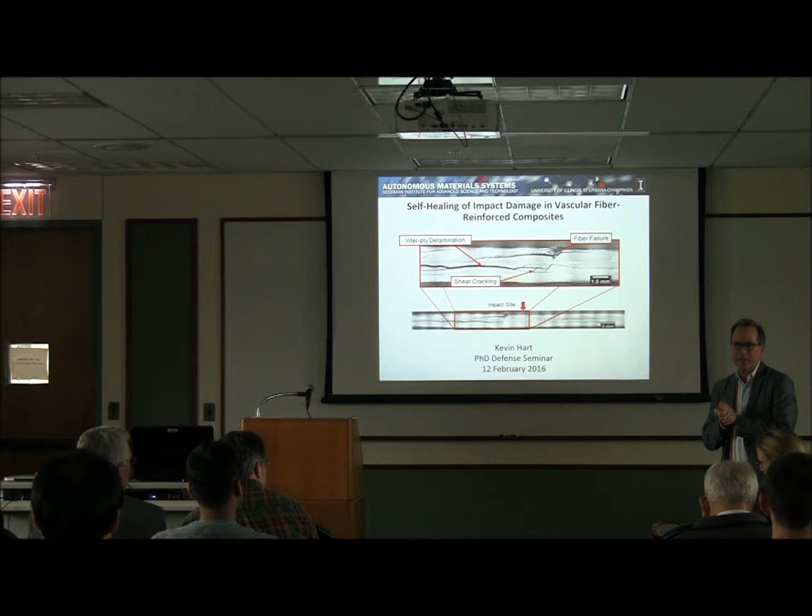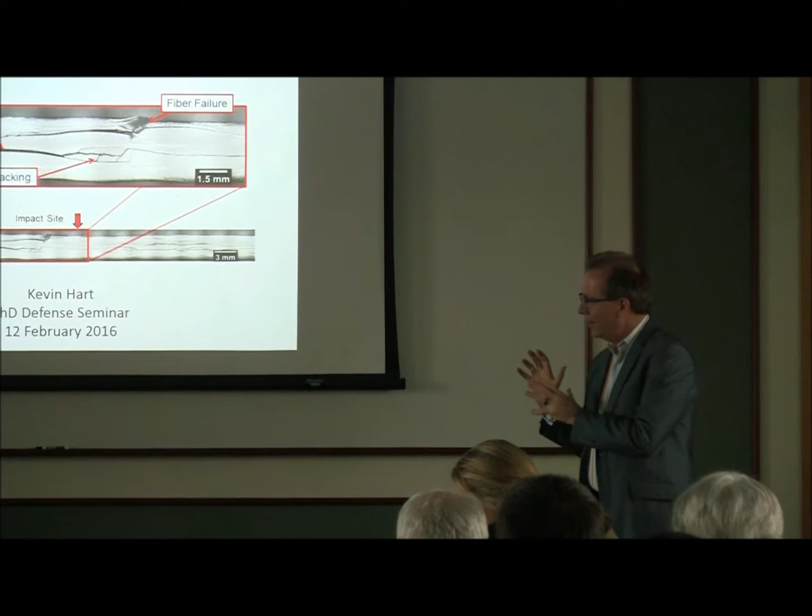He's been with us for a few years now. Came to us from Madison, University of Wisconsin, where he made a name for himself, not only in the undergraduate research lab of colleague Wendy Crone, why he got hired, but also on the football field with the band. He's a die-hard Badger, but we've turned him into a fighting Illini.

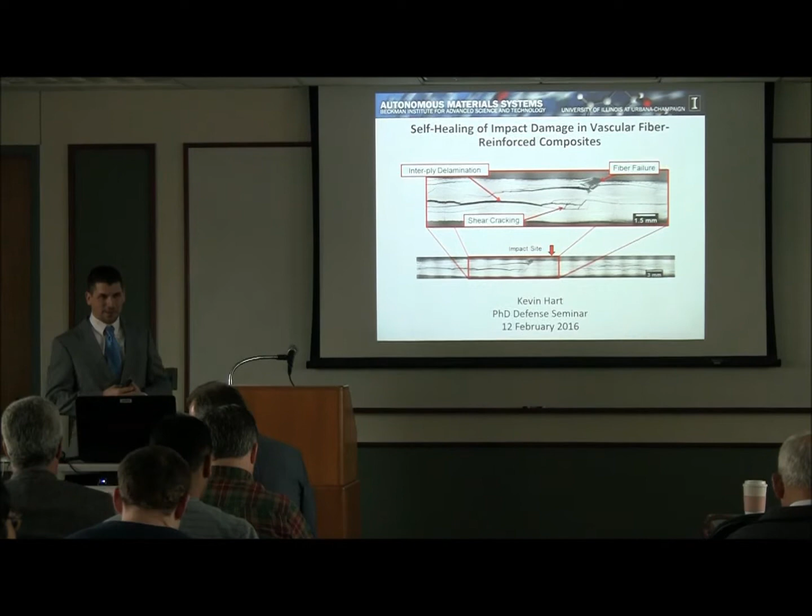Thank you everyone for coming. It's nice to have a really big audience for my presentation today. I'm going to be presenting my dissertation work with the same title as my presentation, which is Self-Healing of Impact Damage in Vascular Fiber-Reinforced Composites.

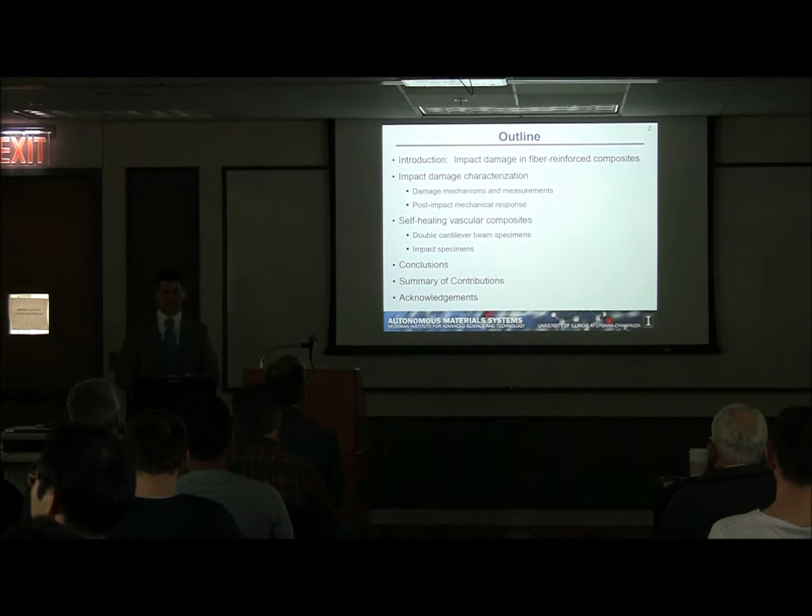So an outline of the talk today: I'm going to go through an introduction quickly on impact damage in fiber-reinforced composites. I'll talk about my contributions, looking at impact damage characterization, and also things I did to accomplish self-healing in a few different types of specimens, including double cantilever beam specimens and impact specimens. Then I'll conclude, provide a summary of my contributions, and finish with the acknowledgments.

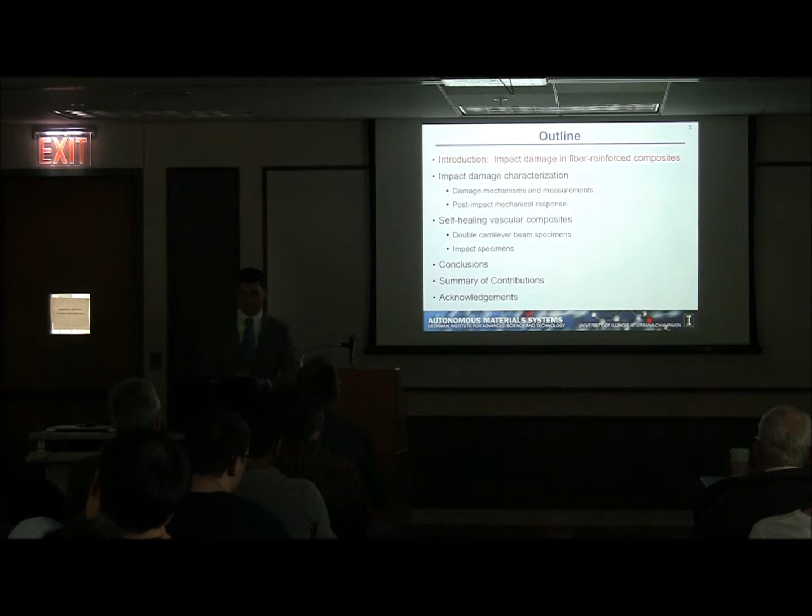First the introduction. I think many people in this room are familiar with fiber-reinforced composite materials, but fiber-reinforced composites are structural materials with two or more chemically distinct phases. These two different phases are usually visually observable in a cross-section. For my particular work, the reinforcement phase I'm going to focus on is glass fiber, and the continuous matrix phase is an epoxy polymer.

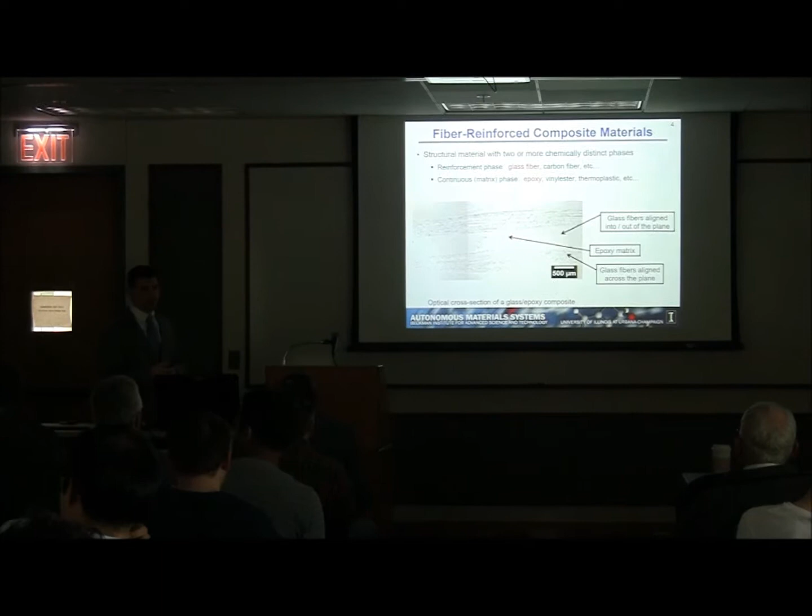So we're going to look at a lot of these cross-sections like this today. I just want to highlight a couple of key things, including tows of glass fibers going across the plane here, some of them coming out of the plane at us, as well as epoxy regions here. So you see the chemically distinguishable components.

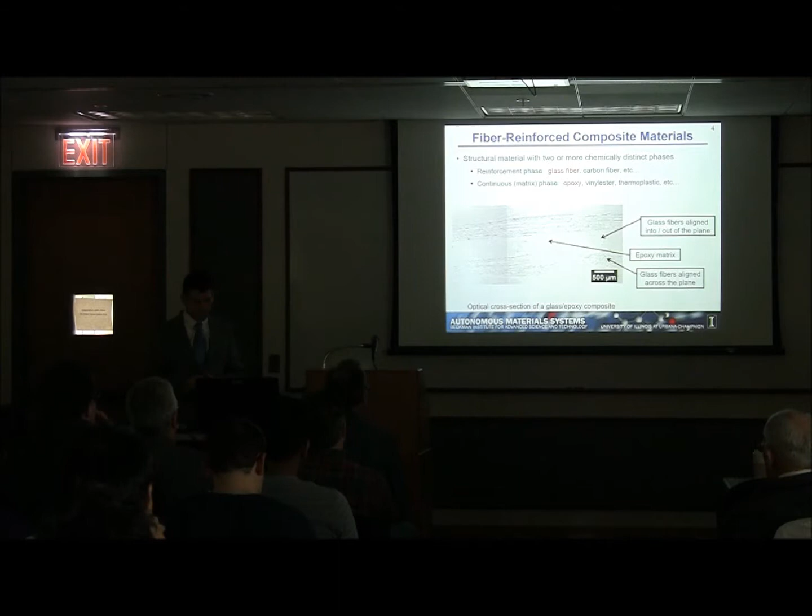Composites are beginning to emerge in our world at a very fast rate. They're useful in applications demanding very light, very strong materials because they have excellent specific strength and stiffness-to-weight ratios. So they emerge in fields like automotive, aerospace, and wind energy, where both mass conservation and stiffness and strength are required.

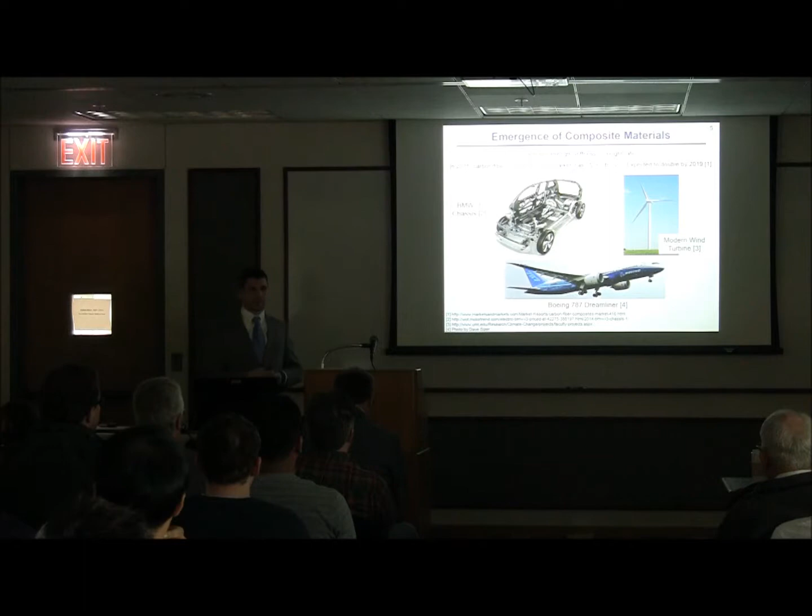To give you an idea of how fast these materials are growing, in 2015 the carbon fiber composite world market was valued at $16.5 billion a year, and that's expected to double by 2019. That's a tremendous growth rate for these particular materials.

But they're not without their disadvantages. One disadvantage of composite materials is they're typically made with a brittle matrix phase, and that brittle matrix phase leaves them susceptible to out-of-plane impact damage and can cause damage inside the material that is large scale and complex. It can compromise the structural integrity of the part.

Here we're just showing a cross-section of a composite with a couple of different damage types. Here we see delamination between fabric layers, shear cracks occurring, and in some severe cases of impact we have fiber failure.

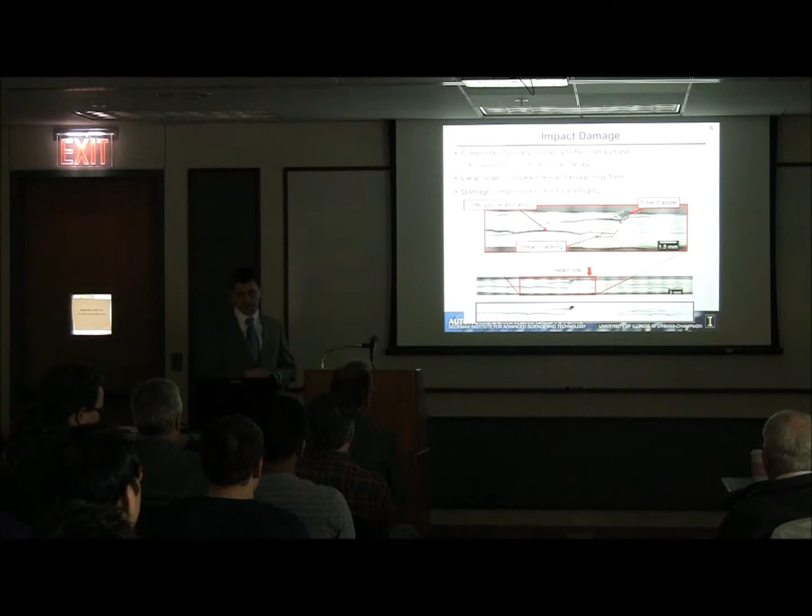Fortunately, I was lucky enough to join a group that worked with self-healing polymers, and the original idea behind self-healing polymers was we wanted a material that had the ability to heal itself when damage was introduced, automatically, without human intervention. That first demonstration was done in 2001 with a capsule-based system.

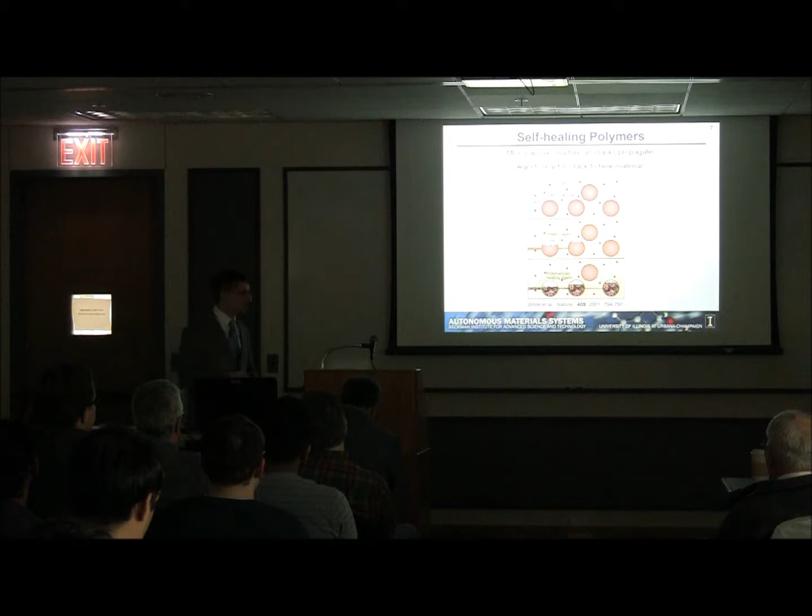In this schematic, we have a microcapsule embedded inside of a polymer system, and this microcapsule has a hard outer shell with a liquid core on the inside. As the material is damaged and a crack propagates through, the liquid is released and reacts with some sort of catalyst or other chemical inside the crack to heal the material back together.

If we consider the damage that actually occurs inside of a composite, it can range in size scale from roughly 1 micron in the case of tensile cracks, for instance, up to hundreds of microns if we have fabric separation, or what we call delaminations.

If we consider using a capsule-based approach for healing these types of damage, it's good for healing the low ends, things like 1 up to 10 microns roughly. But once we have very large damage separations like those of delamination during impact, the crack separations become so large that the microcapsules just don't have sufficient volume to fill all of that damage.

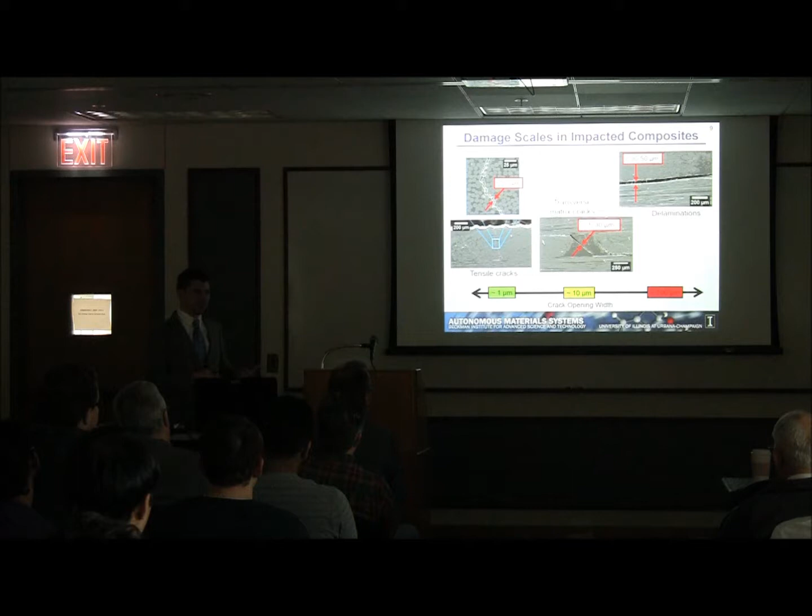This was demonstrated by work by Amit Patel, who is in the audience today, which is awesome. In his work, he created 2D composite plates with microcapsules between the fabric layers and impacted them out of plane. He showed that composites containing self-healing components had compressive residual strengths higher than those of the control case at low impact energies.

But at higher impact energies, the self-healing composites converged to the control case. The reason is that at low impact energies, the damage separation was small enough that we had enough volume of healing agent to fill the damage. However, at higher impact energies, the crack separations were too large and the capsules could not fill the damage.

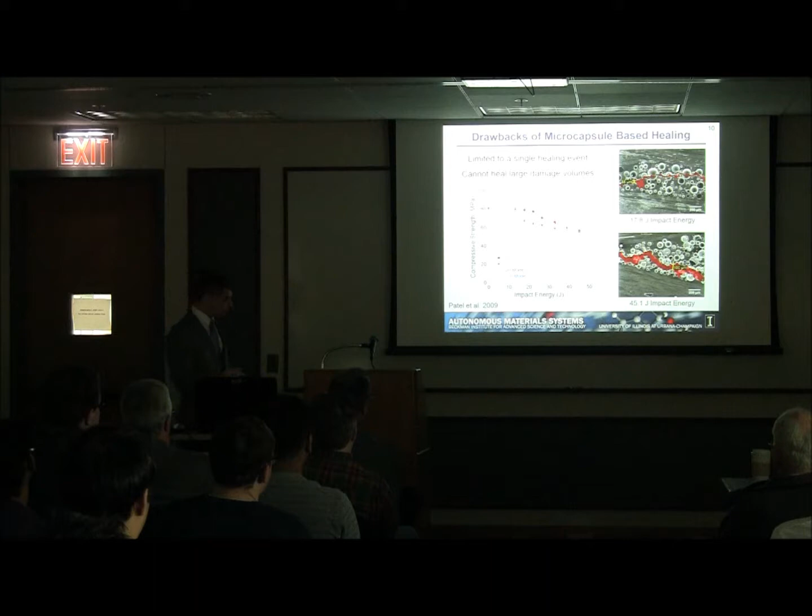Fortunately, there are a variety of different techniques for self-healing polymers and materials, and the capsule-based system is only one of these. What I showed in the previous slide is a demonstration of the limitation of capsule-based systems. But fortunately, there are a few other types, including the vascular-based system and intrinsic-based system.

Vascular-based systems differentiate themselves from capsule-based systems as they have internal vasculature which holds the healing agents, as opposed to discrete capsules. The intrinsic-based systems use a sort of molecular bonding inside of the material to heal across the crack face.

So intrinsic-based materials suffer from the same problems as microcapsule-based materials, and they require molecular bonding across an interface and thus require very small crack separation. So they're not particularly useful for our situation.

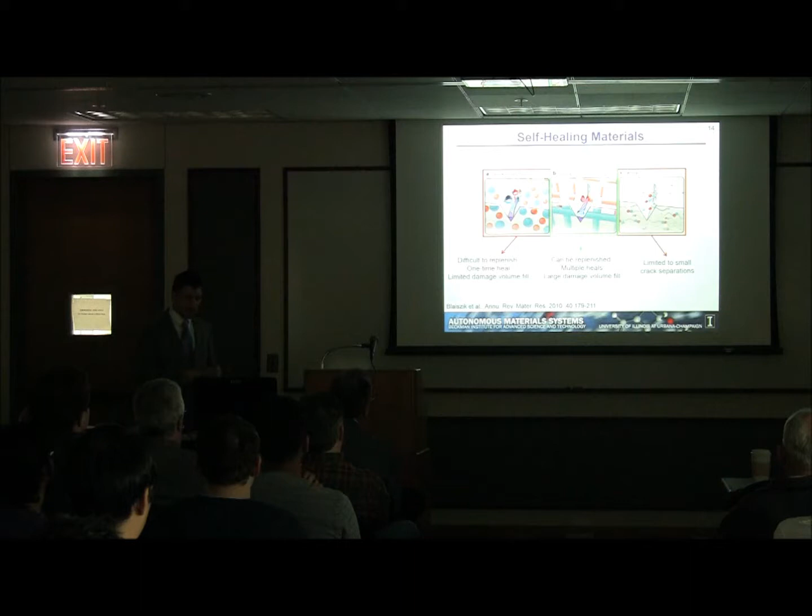But vascular materials are useful. The reason is you can have multiple healing events or multiple deliveries of healing agents, and you can theoretically fill an infinite amount of damage, which is good for our situations where we have a large amount of impact damage present.

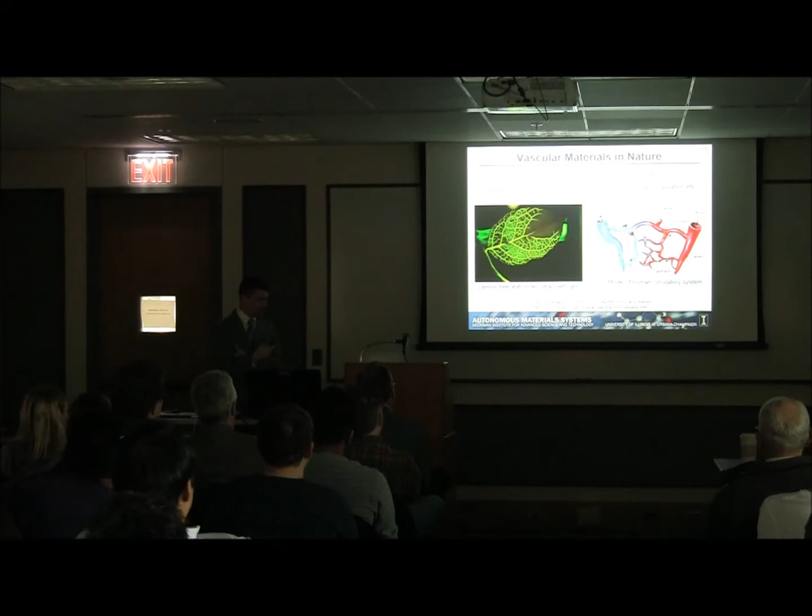If we consider biology, there are many living materials in our world that have this biological vascular network embedded inside it. We're taking some analogies from biology and applying them to our materials. Biological materials used as vascular materials are for temperature regulation, self-repair, nutrient transport, toxin regulation, and many different things.

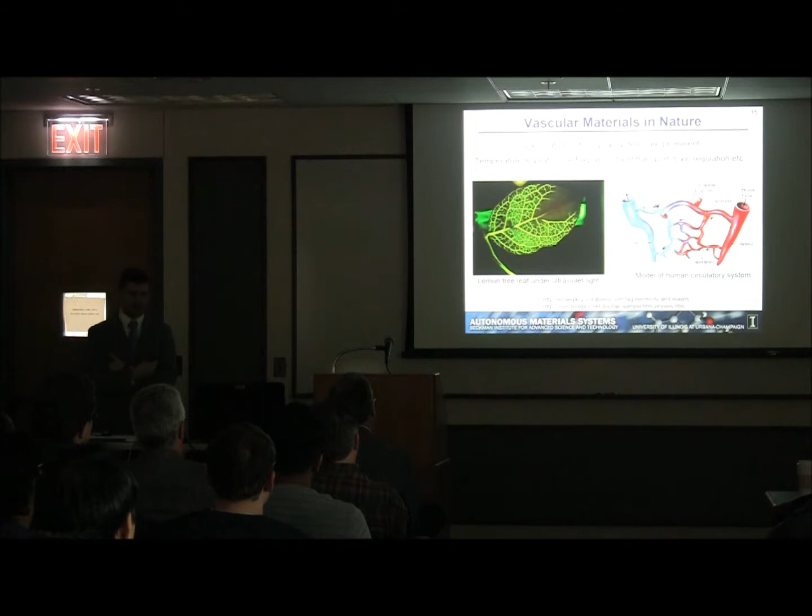So we want to take this biological analog and apply it to synthetic materials. The way that we can do that is we can manufacture vasculature inside of our materials using what we call the vaporization of sacrificial components method of manufacture.

In that method of manufacture, we take advantage of what we call sacrificial fibers, highlighted in pink here. We can co-weave these sacrificial fibers with the glass fiber preform, then infiltrate the composite with resin, where it becomes a hardened solidified composite with that sacrificial material embedded inside of it.

Then we can raise the temperature of these composites to 200 degrees Celsius for 24 hours, where that sacrificial element depolymerizes and evacuates from the system, leaving behind a series of hollow channels inside of the composite.

Then we could fill the hollow channels inside of that composite with whatever functional fluid we desire, to apply whatever multifunctionality we would like to demonstrate.

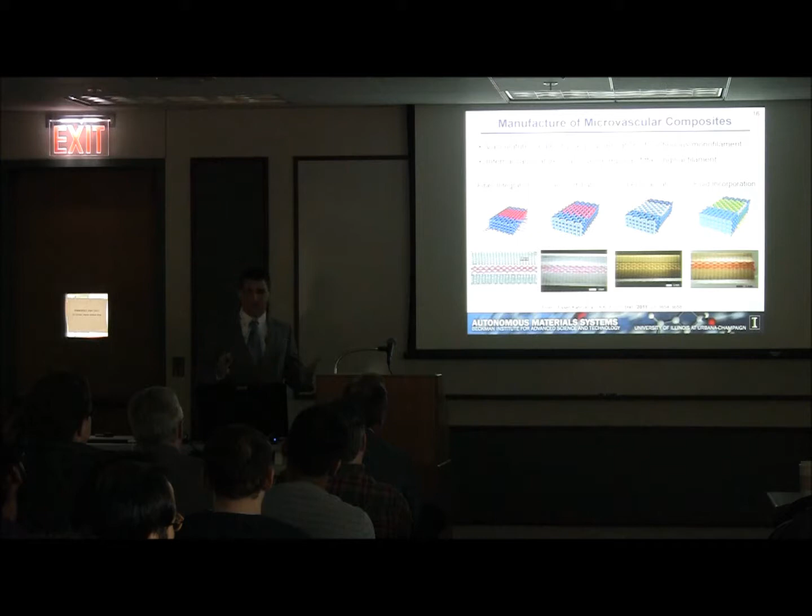In the original publication, they did this in a variety of ways. Using the same composite, they had a heated composite that passed coolant through to keep the material cool. They did a chemical reaction inside of a composite. They changed the magnetic properties of the material using a ferrofluid, and they embedded a liquid metal inside of the material to change the electrical conductivity.

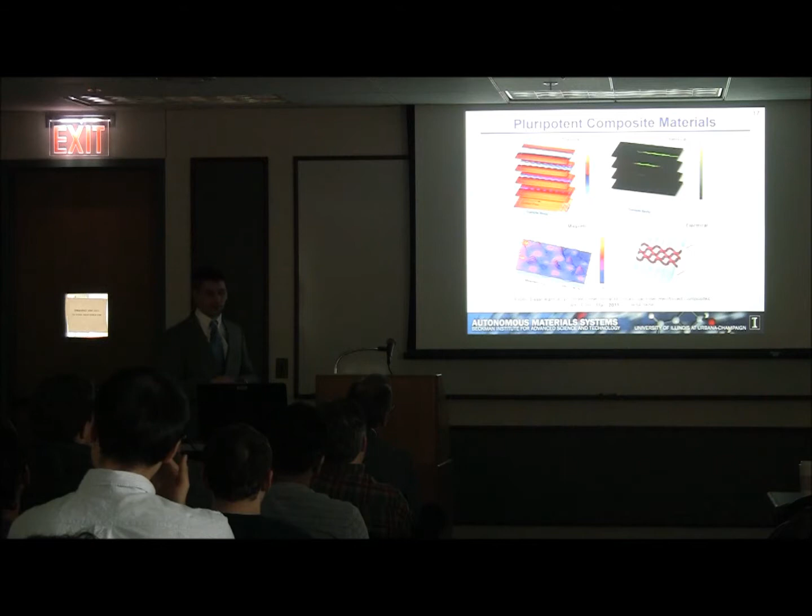So what I want to do is introduce vascular networks for self-healing applications, and it will broadly follow a scheme that looks something like this. If we have a composite laminate that has vascular networks running through it, these vascular networks are going to contain one of a two-part healing agent system.

Then as the material is damaged and delaminations propagate, the materials spill into the crack plane where they mix, polymerize, and heal the material back together. So this is the basic scheme that I'm going to follow for my self-healing applications.

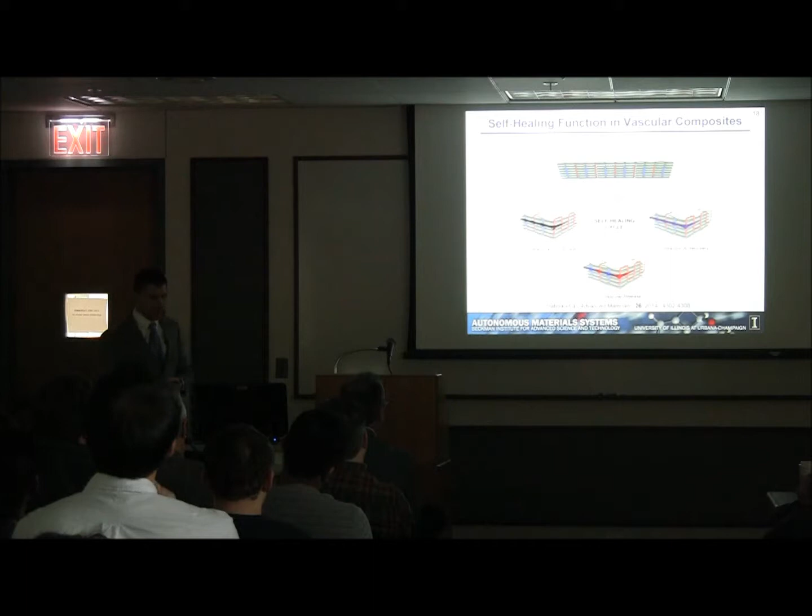That brings me to the objective of my PhD work over the last 5 or so years. One objective would be to characterize the damage formation and mechanical performance of these impacted composites, because if we're going to attempt self-healing, we need to be intimately familiar with the damage that forms and what damage leads to reductions in mechanical performance after impact.

Secondly, we're going to develop methods for healing impact damage using vascular delivery of these healing agents. Thirdly, we'd like to investigate some alternate chemistries for this vascular healing scheme. I won't have a lot of time to talk about that today, but it was something important in my work. So, continuing on with my contributions now.

We'll look at impact damage characterization and post-impact mechanical properties. If we consider some of the factors that influence damage formation and propagation, we can largely classify them into two different sort of factors.

One would be material factors, so that would be things like the matrix material toughness, fiber ductility, interface sizing selection, and hybridization. For example, a thermoplastic matrix coupled with an epoxy matrix would be a hybridization idea.

We can also consider architectural factors, such as: do we have interleaves between fabric layers? What is our stacking sequence, and how does that affect damage propagation? Do we have stitches or Z-pins moving through the material? And are we using woven architectures?

Woven architectures were particularly interesting to me because there's a hole in the literature which I could fill during my impact damage study. For that reason, I investigated some of the differences between 2D and 3D architectural composites.

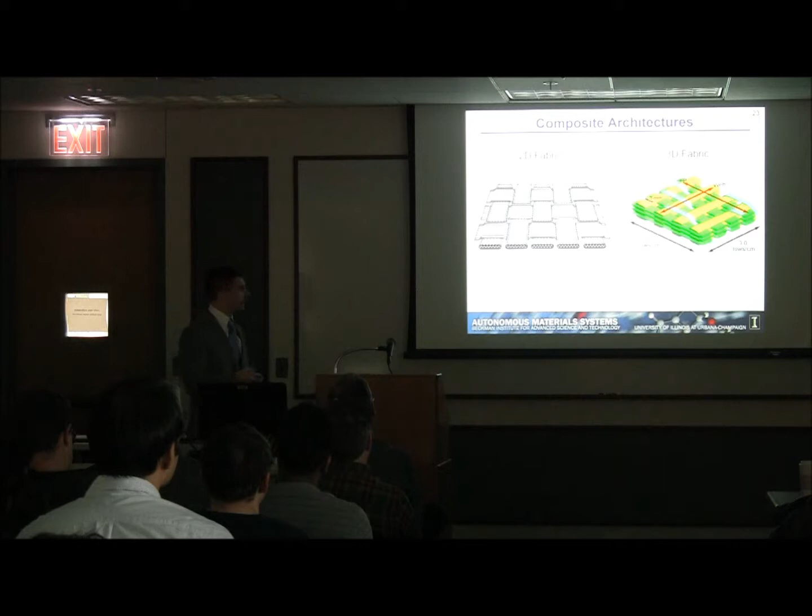What I mean by these 2D and 3D composites is the architecture of the glass fabric before it gets created. 2D composites that are typical can be an over-under weave, with fibers going in the X direction and Y direction. Whereas a 3D fabric can have an X direction in yellow, Y direction in green, and maybe a through-thickness tow, which we call a Z tow, that provides reinforcement in the third direction—which is why we call it a 3D woven composite.

3D composites are relatively new to the world of mechanical composites, and there was a review article done in 2010 where the author concluded, in a comparison between 2D and 3D composites, that it is not possible to state conclusively that 3D composites are superior, because many researchers failed to report important data, including the in-plane fiber volume contents of 3D and equivalent 2D materials needed to interpret improvement properties.

This is where I saw a hole in the literature and what I wanted to take advantage of. Until now, there was no study comparing damage formation and post-impact properties of 2D and 3D woven composites made from the same materials.

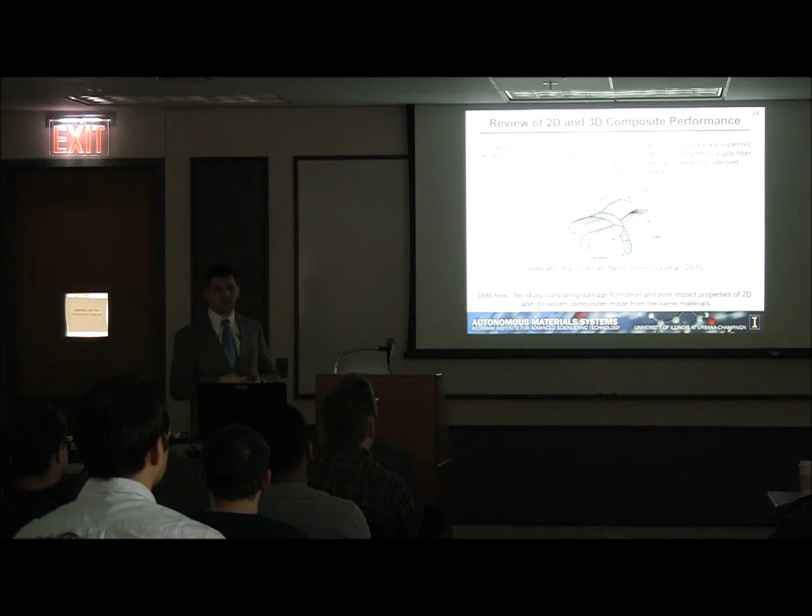The impact protocol we employ to look at the damage and evaluate the post-impact properties is the Fletcher-Esser impact protocol. In this protocol, we make beam specimens about 110 millimeters long and 20 millimeters wide. We clamp those specimens in a fixed configuration and impact them out of plane with a cylindrical impact head. Then after we introduce impact damage, we take those samples into a 4-point flexure to determine their flexural strength and stiffness.

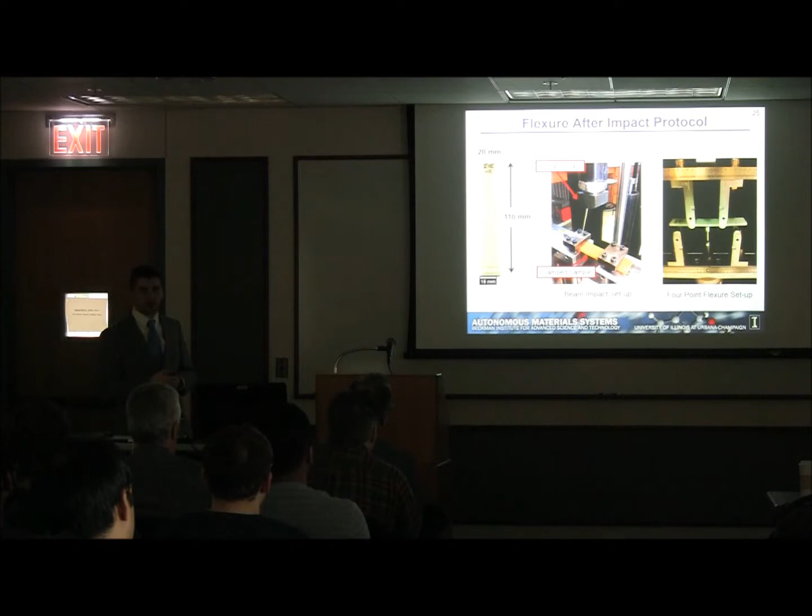A little more detail about the impact protocol: we're using a 25.4 millimeter radius of curvature impact head. The unclamped length here is 40 millimeters. We're using impact energies ranging between 0 and 25 joules, and the impact velocity is roughly 2 meters per second, so this is considered a low velocity impact.

We're recording the time, load, and velocity, and from that we can calculate displacement using simple 1D dynamics. For post-impact flexure testing, the inner span is the same as the unclamped region in the impact, so 40 millimeters. The outer span is 80 millimeters.

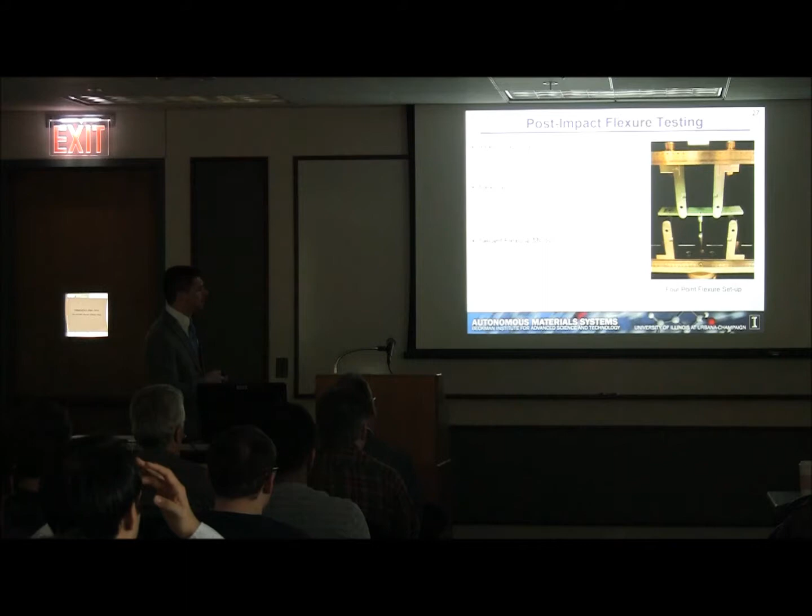To fabricate the samples, we're using the same epoxy matrix for both 2D and 3D architectures: a diglycidyl ether bisphenol F resin and an aromatic amine hardener, the EPON 862 Epikure W system. We're fabricating these using a vacuum-assisted resin transfer molding technique, or VARTM, at 70 degrees Celsius in an oven, and we cure these samples for 8 hours at 121 C to solidify them.

The 2D fabric architecture is comprised of 5 layers of 24 ounce per square yard S2 glass, giving us a total areal density of 120 ounces per square yard. That yields a fiber volume fraction of roughly 52% and a thickness of about 3.1 millimeters. The 3D fabric, in a similar analog, has 1 layer of 120 ounces per square yard fabric.

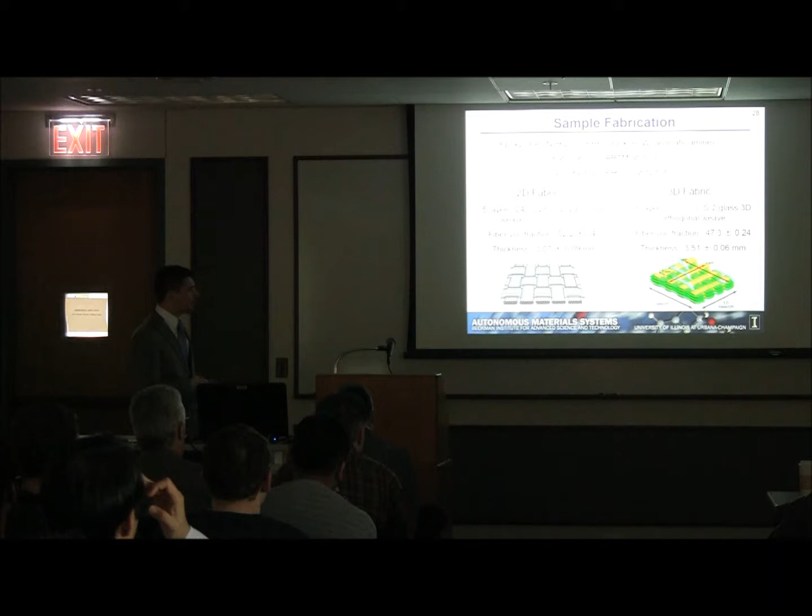Again, it's an S2 glass woven orthogonally, like you see in this picture. It's important for us to match the materials, so the fiber type and epoxy type, as well as the aerial densities of the fabrics, to minimize differences in the architecture as much as possible. These yielded fiber volume fractions of about 47%, with thicknesses of about 3.5 millimeters.

These load drops correspond to the introduction of a very particular type of damage inside our composites, and that damage is delamination damage.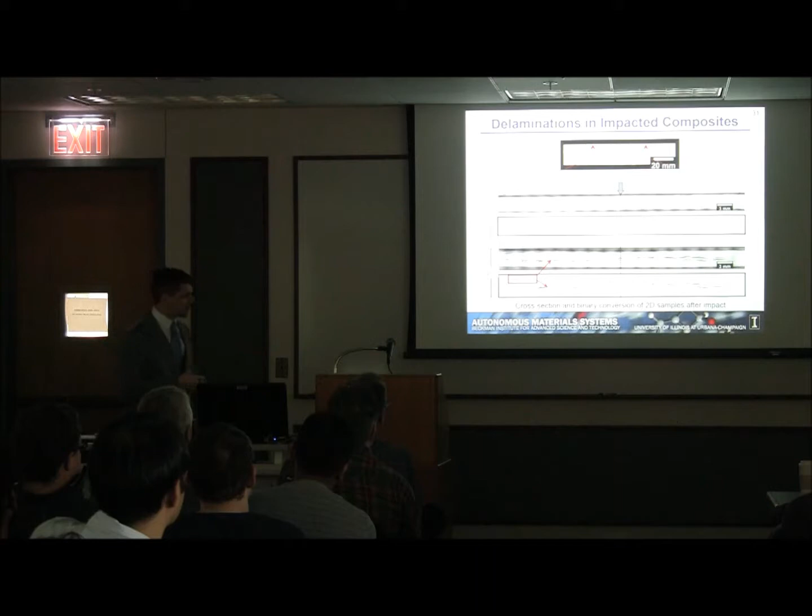Interestingly, going through the literature, we can see that other authors have identified this drop in load during impact and have coined it the delamination threshold load - the load required to introduce delamination damage inside the specimen. This is from another author's work where he's identified this first reduction in load as the delamination threshold load, which corresponds roughly with what we see in our specimens.

We can look at and identify this delamination threshold load for both architectures across a variety of impact energies and plot that. Here we're plotting this delamination threshold load value as a function of impact energy. What I found extremely interesting is that this delamination threshold load is consistent across the impact energies and across architectures. So this tells us that damage initiation - the initiation of delamination damage - is really dominated by the materials and not by the architecture. This is consistent with some other studies that have looked at these phenomena.

Then we can take these damaged specimens and evaluate them in flexion. If we look at typical stress strain curves for these samples across a variety of impact energies, we see that as impact energy increases, we start to see less stress at failure, and also lower moduli during the flexion testing.

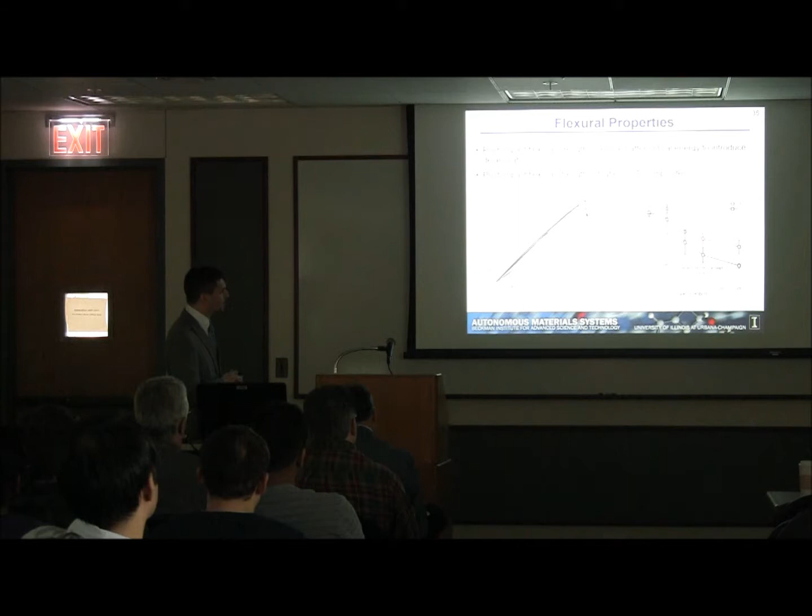If we plot the flexural strength as a function of impact energy, we see that with the 0 and 5 joule cases, the residual strength of these composites is roughly the same. However, after we pass some threshold energy to introduce the delaminations - shown by this vertical line - we start to see significant reductions in flexural strength. This tells us that this delamination damage mode is driving the reductions in mechanical properties.

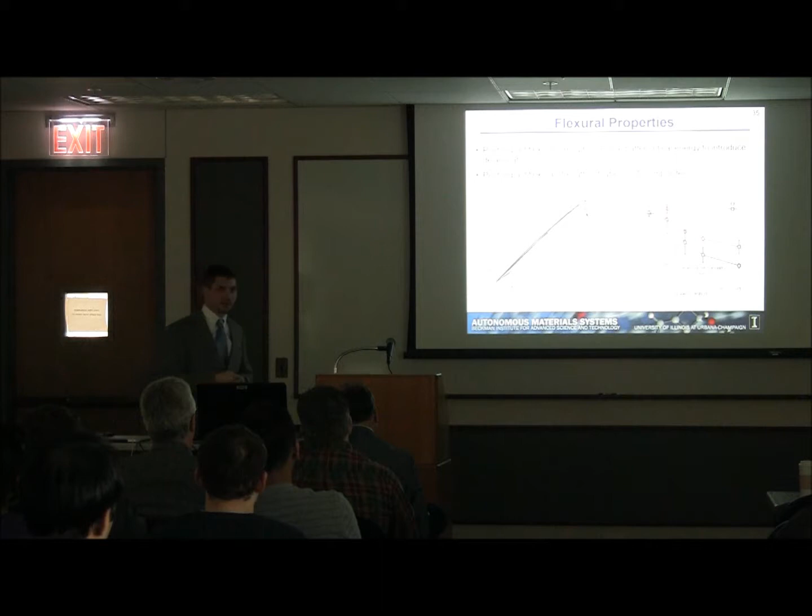What's also interesting is that the 3D composites tend to retain significantly more flexural strength after impact damage compared to 2D composites impacted at the same energy. Our hypothesis was that 3D composites might have less damage because of the through-thickness tow compared to 2D composites, which might be why the residual strengths are higher. So we looked at the delamination sizes of these samples after impact.

We looked at two different metrics. One metric is the delamination length, simply the total length of the delamination in these images. We also looked at the delamination opening, which is the total cross-sectional area of the delamination crack opening in these images - all the pixels summed together, multiplied by the calibration of a single pixel.

If we plot these delamination metrics as a function of impact energy, we see that as we increase the impact energy, the delamination size grows for both the length and the opening, which is rather intuitive - the more energy you deliver, the more damage you're going to have.

Interestingly, and somewhat expectedly, the 2D composites tend to exhibit more delamination opening and length as we increase impact energy compared to the 3D composites. We believe there are two mechanisms which act to limit the delamination opening in the 3D composites.

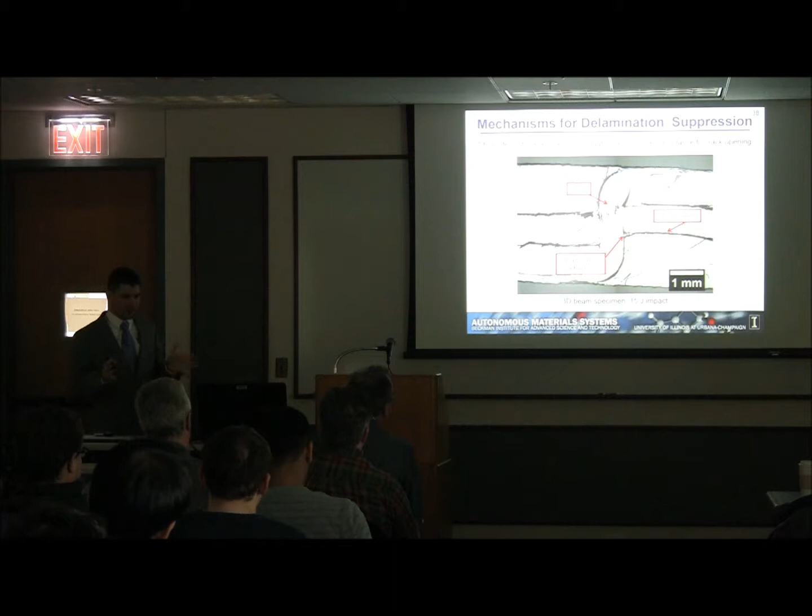The other mechanism is simply the through-thickness reinforcement that the Z tow provides, a restriction of opening provided by the forces in the through-thickness direction of the Z tow.

To conclude some of the impact study findings: we looked at the delamination threshold load, and it was consistent across architecture and impact energies, indicating it was a material-dominated phenomenon. We looked at delamination opening and length, and saw that it was reduced in 3D composites compared to 2D.

And the mechanisms present that allow that are Z tow bridging and delamination deflection. We looked at post-impact flexural strength and saw it was higher for 3D composite architectures, and we hypothesized that's because the delamination sizes in 3D composites are smaller than those of 2D composites.

So the big takeaway message as I thought about moving forward into self-healing is that it's really healing of delamination damage that's important. It's this delamination damage that dominates the reductions in post-impact strength after damage has occurred. So if we're going to use self-healing applications with vascular networks, we really need to target this delamination damage.

That brings me to the self-healing portion of the talk using vascular networks. We looked at two different sample architectures to investigate healing inside our vascular-reinforced composites: one would be the double cantilever beam specimen, and one is the impact specimen.

If we generally consider an impacted composite and think about a vascular network to incorporate into it, you could imagine a network looking something like this, where we have a channel running through, coming up through the composite at one point and out the other side, where at that discrete point where the channel intersects with damage, we have agents that could fill in the crack.

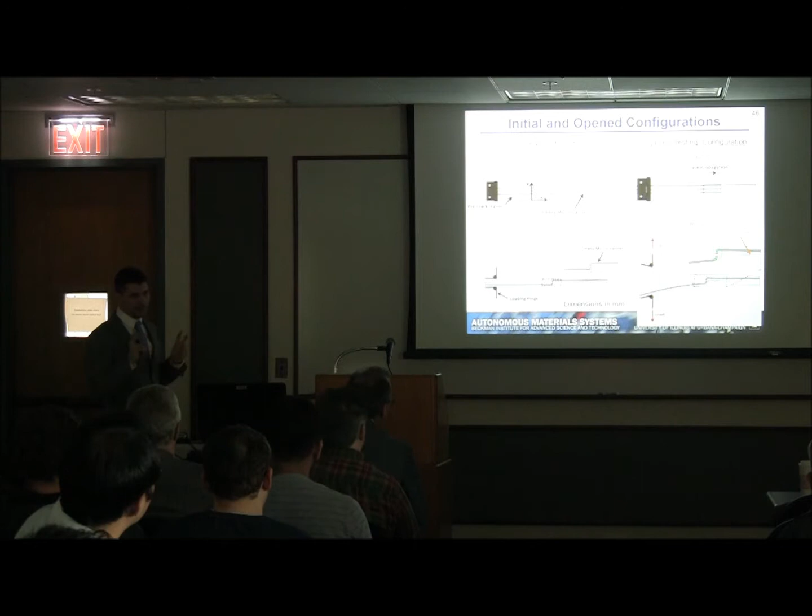So how that looks when we're actually testing the sample and as the crack is propagated is, again, top view, side view. After the crack is propagated through the sample, we actually pierce the microchannel at a location which we know, and which we can call the piercing point. So then we close the sample, and we have a delamination inside of the double cantilever beam.

This is sort of representative of what we might have during impact. And we can deliver the healing agents to the backside through those channels, where our resin and our hardener are delivered to the crack plane, where they will then meet each other, mix, polymerize, and heal the material.

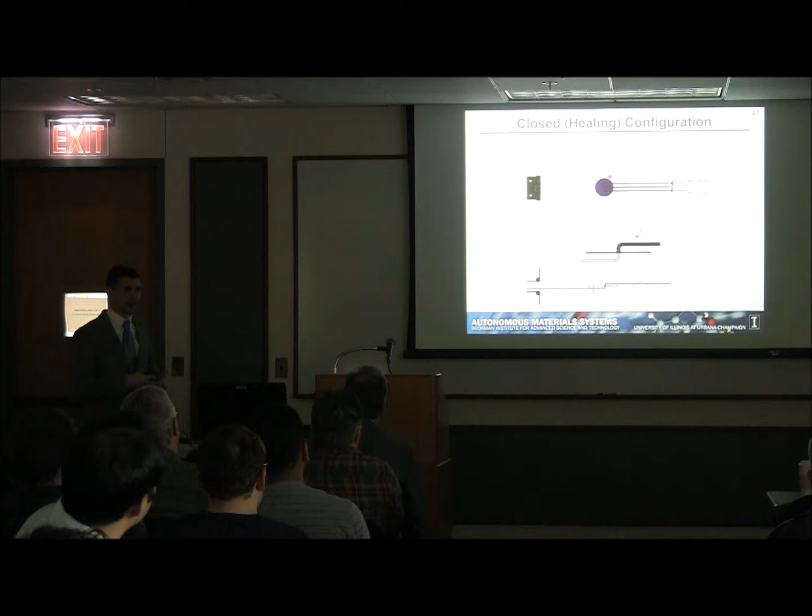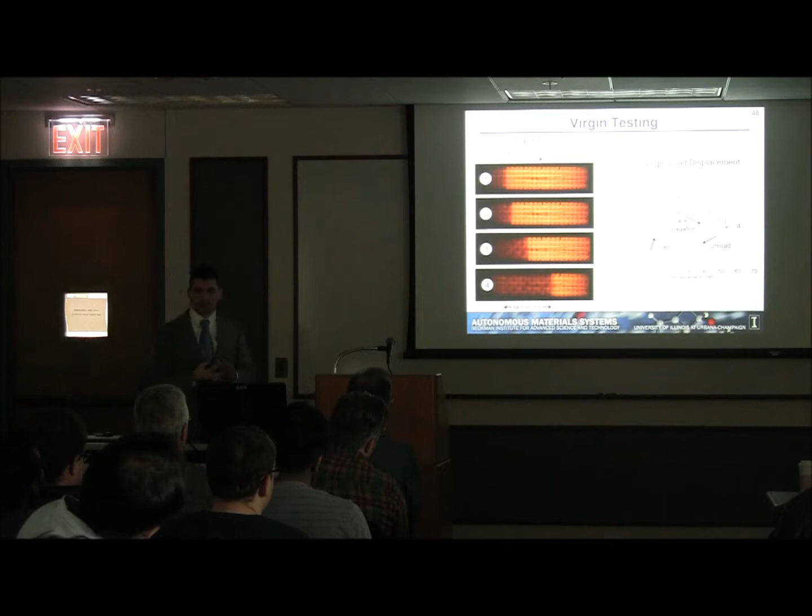As the crack propagates from left to right, we have a load up, and we start to see the stick-slip behavior of the crack propagation until we get to a point of 50 millimeters of crack opening, and then we unload the sample to close it and give ourselves this delamination damage.

After this virgin testing, we can evaluate a property of those double cantilever beams known as the critical strain energy release rate. Our G1C is the symbol we're going to use for this, and G1C is calculated as delta U over B delta A, where delta U is the energy required to open the crack, B is the sample width, and delta A is the crack advance during testing.

So it's a measure of energy per crack open area. And this energy required to open the crack is simply the area encompassed by the load-displacement curve.

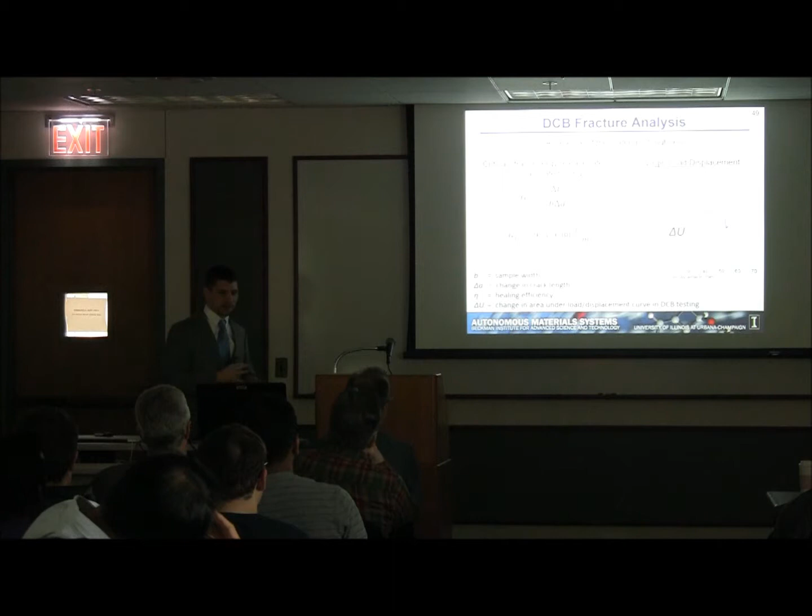So for our composites, the G1C value is roughly 975 joules per meter squared, which is on par with fabric and material architectures similar to what I've used.

Again, after that first testing, we can then close the sample and deliver our healing agents in through the backside. The healing agents we're using here are an epoxy resin, EPON 8132, and an amine-based hardener, Epicure 3046.

These are chosen because they're low viscosity components and they have a lot of heritage in the group, and they polymerize at room temperature, which is important for us. The stoichiometric ratio of these components is 1.9 to 1 by volume, resin to hardener.

To deliver agents through the sample, we're going to use a pulsatile pumping scheme inspired by previous work in the group by Andrew Hamilton. In his particular delivery scheme, he's alternating resin and hardener and giving a little bit of wait time between each one of those pulses.

So then after we fill all the damage, we allow 48 hours at room temperature, or 30 C, which is sort of the control room temperature, for healing to occur.

Then, after healing has occurred, we can reload those samples and get a measure of the healed critical strain energy release rate. We can then define a healing efficiency metric, which is the ratio of the healed to the virgin critical strain energy release rates.

In our particular case, since we have the same sample, which has the same width B, and the same crack advance length delta A, that simplifies to the ratio of the energies required to open the cracks, delta U, or the ratio of the encompassed load-displacement curves.

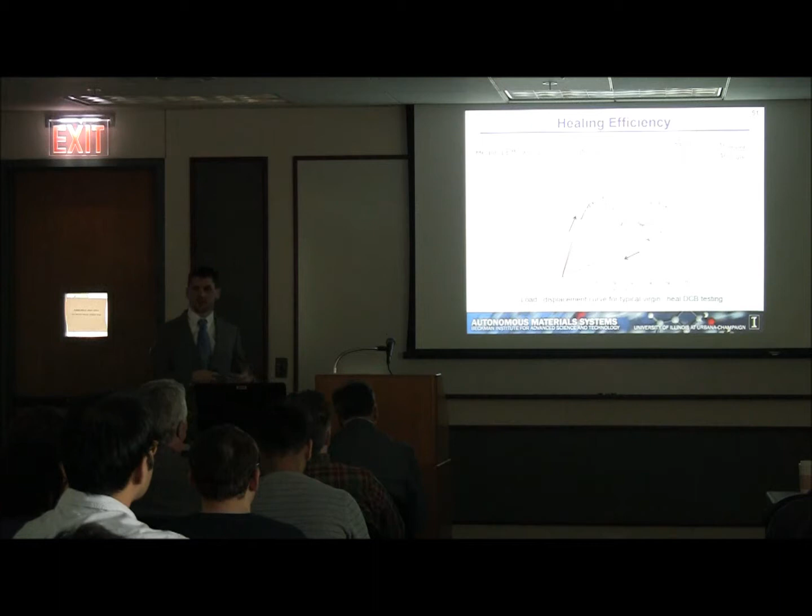So in this particular sample, we had a healing efficiency of 105%. That tells us that we recovered 105% of the original fracture toughness of the material using our particular delivery scheme.

What is the crack opening of yours? The impact is on the order of 30 to 50 microns for my specimens. And the DCB, I do have a binder clip on where the hinges are as it's being healed. I put that under the microscope and looked at it, and it ranges from about 12 to 30 microns.

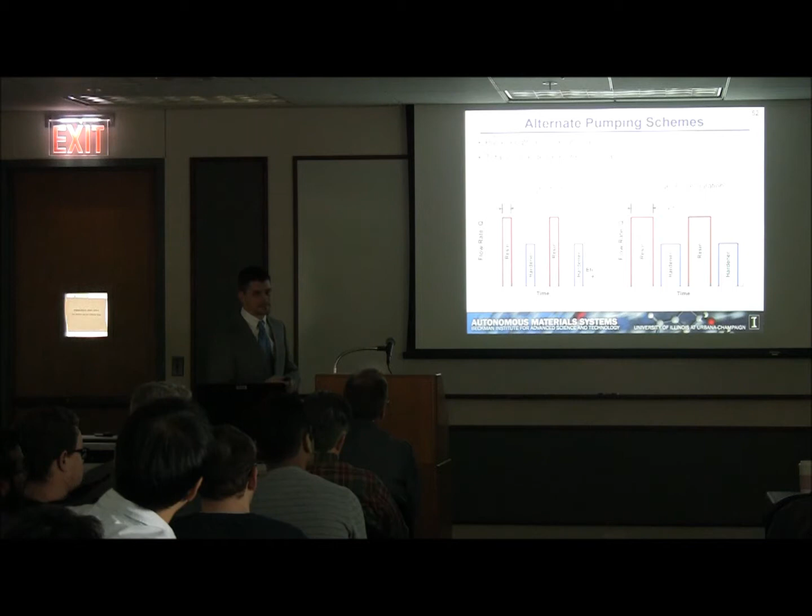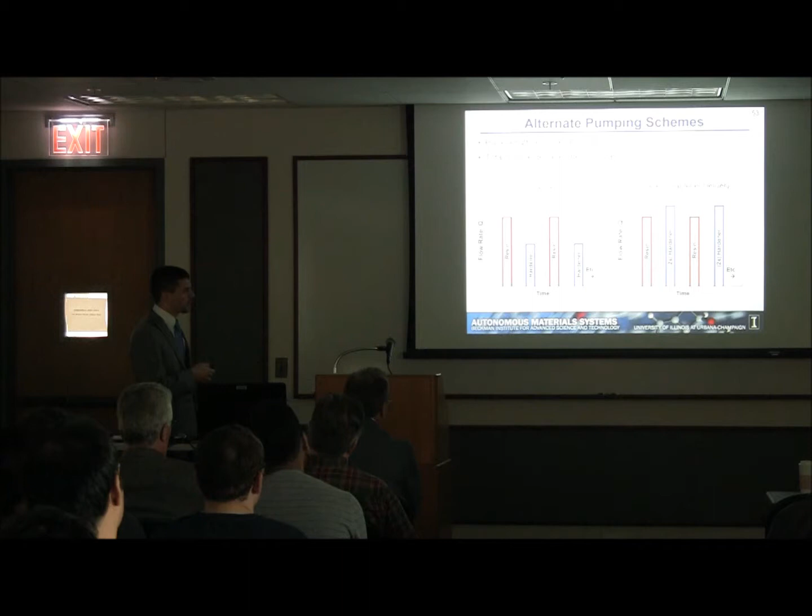So we can also look at alternate pumping schemes. We did deliver in stoichiometric ratios to start, but we also looked at varying the pulse duration. In this case, we're delivering twice the amount of resin per pulse, or twice the amount of hardener per pulse. And we can also look at delivering in all stoichiometric ratios, so delivering twice the stoichiometric amount of hardener, or likewise twice the stoichiometric amount of resin.

We can plot all those results on the same curve to get a feel for how this works. Here we're plotting the percent resin delivered. We're at 65% resin and 35% hardener delivered, which is the stoichiometric mix ratio by volume. Then we can plot that using the healing efficiency metric I described before. We see that with the longest pulse duration, 30-second pulse duration, with the stoichiometric mix, we have roughly 95% recovery of these samples.

Interestingly, as pulse duration went down, the healing efficiency also went down, so shorter pulses led to less healing efficiency. Also, the system was quite tolerant of excess hardener. When we had very long pulses and delivered twice the stoichiometric amount of hardener, we still had recovery of roughly 90%, which I thought was quite interesting. However, the system wasn't quite as tolerant of excess resin, and we had roughly 50% healing in the best single heal case with twice the stoichiometric amount of resin delivered.

I think it has to do with the coverage of the crack in relationship to where the microchannels penetrate with each pulse. If the pulse is not able to cover the area encompassing the surrounding exit of other microchannels, it might limit the infiltration. I think it has to do with the size of the area that is filled during each one of the pumping pulses.

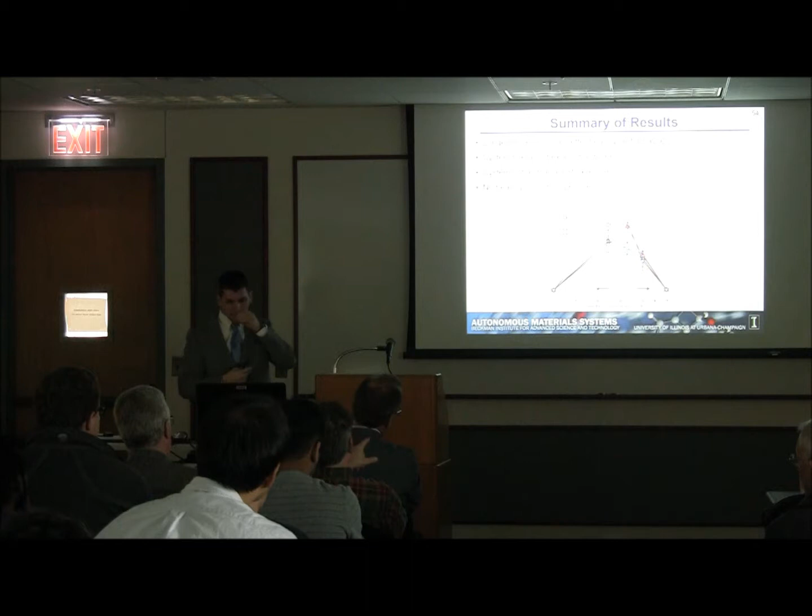So we can take the best performing healing cycle from our single heal tests and actually apply that over multiple healing cycles. And if we use multiple healing cycles, we have to be sure to keep the channels clear during each one of these cycles. So when doing these multiple healing cycles, we're actually purging the channels during the healing event between each cycle. That's one distinct difference between the two different methods.

When we do apply the best healing agent delivery, we see repeat healing is possible as long as the channels are clear, and we're able to show up to 10 cycles of healing with roughly 50 to 65% efficiency. This really is the first demonstration of 10 multiple healing cycles, taking advantage of vascular redelivery over and over to the same area of the crack plane inside the specimen. I think this was one of the better accomplishments of my time here at Illinois.

So to continue with my outline.

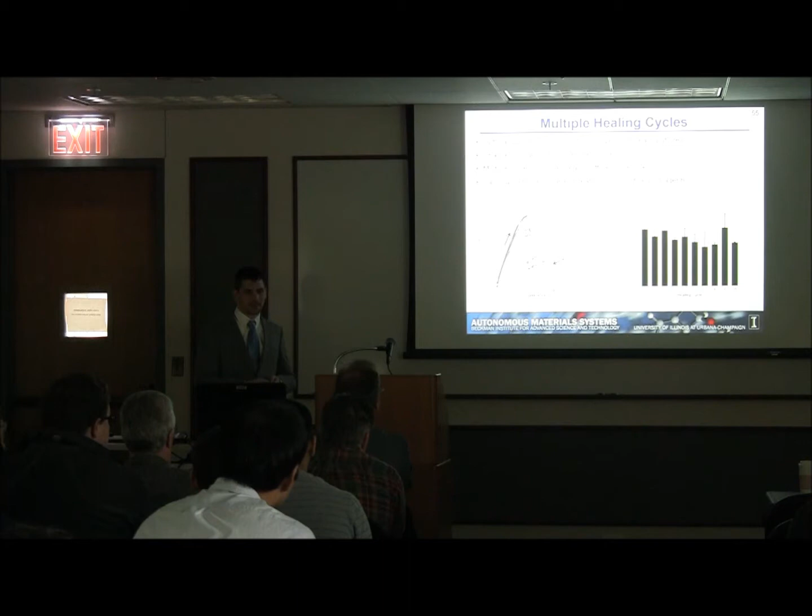It looks like more of a very dynamic propagation. Maybe this one had a little more ductility or slow opening, but less stick slip. The rest is pretty far out, on the back end, far from the channel on the back side. So it's hard to really quantify it using this plot. You'd have to plot G1C as a function of delta A, which would be more useful, so I can't say straight away. I'd guess it probably dynamically propagates near where the channels are. Or maybe somewhere in the middle of the propagation, maybe here or here.

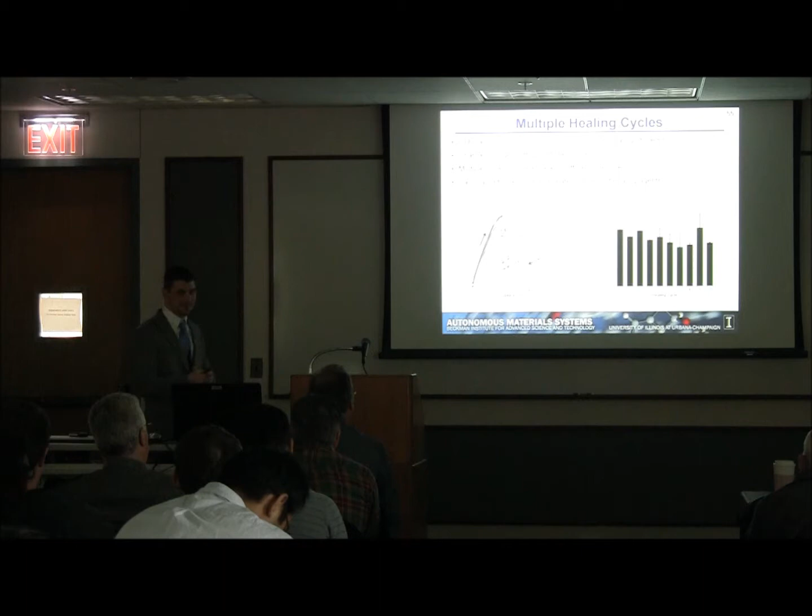Okay, so I'll continue now with looking at impact specimens. At the same time as I was going through the double cantilever beam specimen studies, another graduate student named Brett Krull was looking at a new delivery method which overcame some of the mixing problems I saw in the DCBs, and that previous researchers before me had seen with these two-part healing agent systems. He used a new way to deliver agents to the crack plane, which he coined air-assisted reagent propulsion, or ARP for short.

In this particular system, what he did is have a central channel with high pressure, high velocity air flowing through it. Tangent to that, our liquid agents, the epoxy and the hardener, came in from the side and streamed into this main air line. The air moving at high velocity would shear these droplets off into the airstream and deliver them to the crack plane as discrete droplets, instead of as a continuous stream like what I had previously done with my double cantilever beams. He was able to show significant improvements in the mixing using this.

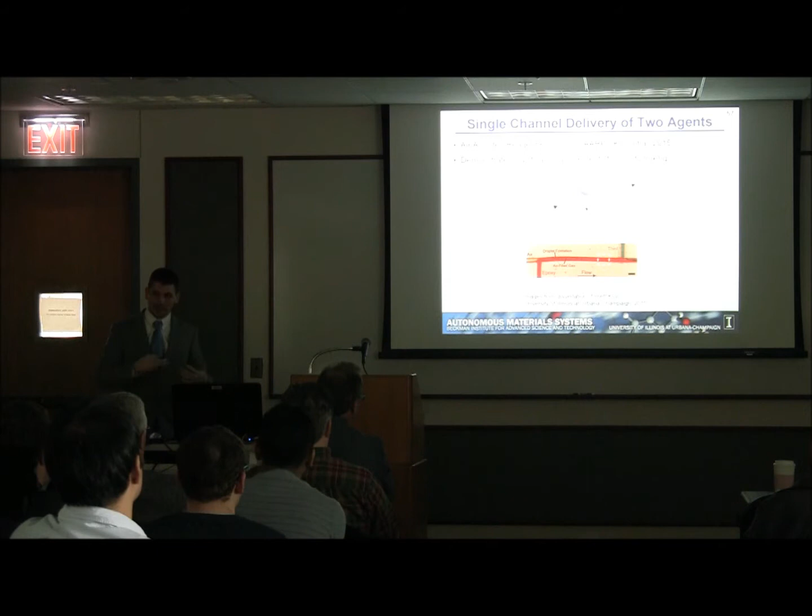To design the healing of our impact specimens, we again used our beam specimens, the same as in the first part of the study looking at damage characterization. We're using the same materials: S2 glass plain weave, EPON 862 resin, using a vacuum-assisted resin transfer molding technique for infiltration, and the same cure schedule. Now we're adding an evacuation step: sacrificial component evacuation, 24 hours at 200 C. So again we're incorporating these sacrificial elements and then evacuating them afterward. The network geometry here is two channels with piercing points in two separate locations, and external to that we have our air-assisted reagent propulsion mixing chip.

This is also made out of composite in a similar way, with sacrificial components evacuated out afterwards. We made this external so that we could have consistency between our different samples, and also so we could quickly deliver to multiple different channels in a sequential pattern.

The impact testing procedure is very similar to what we did before, using the same impact setup: 25.4 millimeter radius of curvature, 40 millimeters of free span, and impact energies ranging from 0 to 15 joules in this particular case.

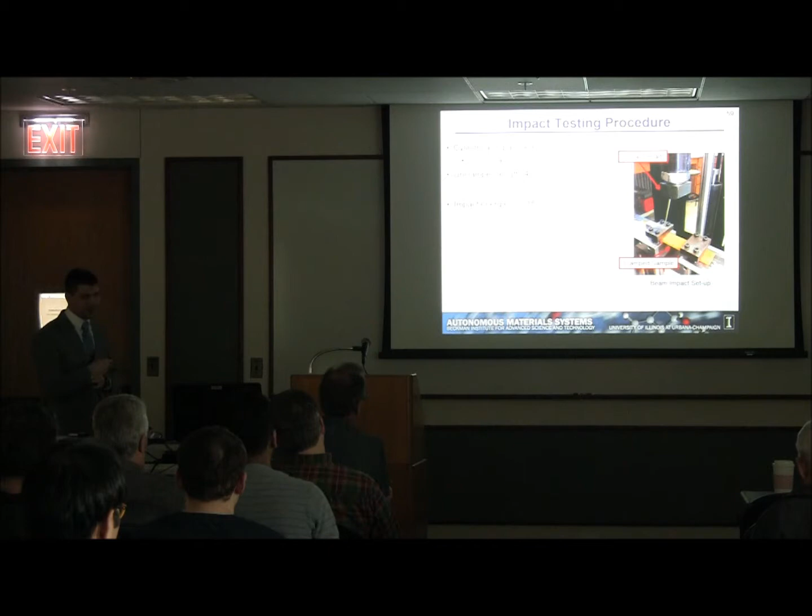To deliver the healing agents, we had a setup that looked something like this. We had resin and hardener components stored in syringes and delivered using volumetric delivery through a syringe pump to our mixing chip. The air was controlled on the backside by holding the pressure constant during the entire delivery. Then we had a small amount of Tygon tubing going between the mixing chip and the flexure sample, and we monitored the filling overhead using a camera. This was all synced together using a computer.

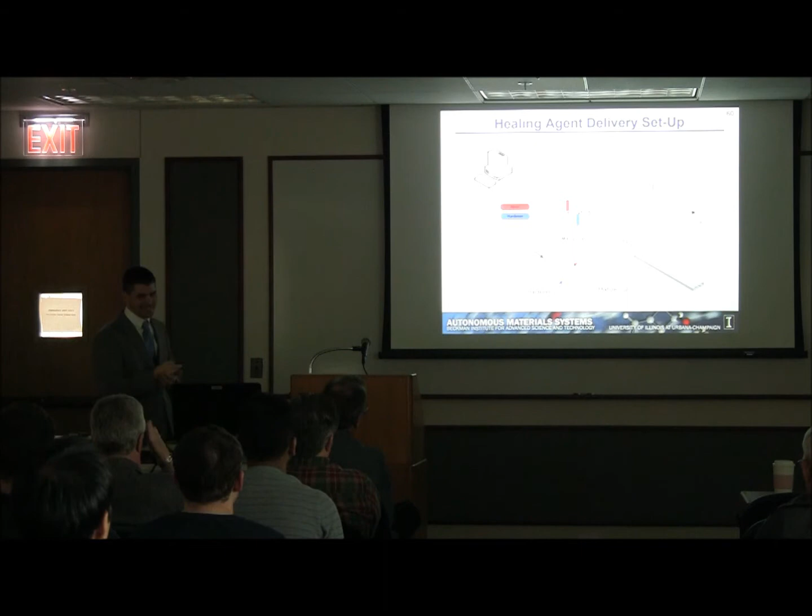The healing agent delivery setup, if you want to visualize this, looks something like this. Here's our mixing chip with the resin and hardener components going into the opposite sides, with air coming in on the backside pushing those components. It's delivered through the short amount of Tygon tubing to our flexure specimen that's been impacted, which you can see here. This is the damaged region, and you can see the optical mismatch which occurs at the delamination.

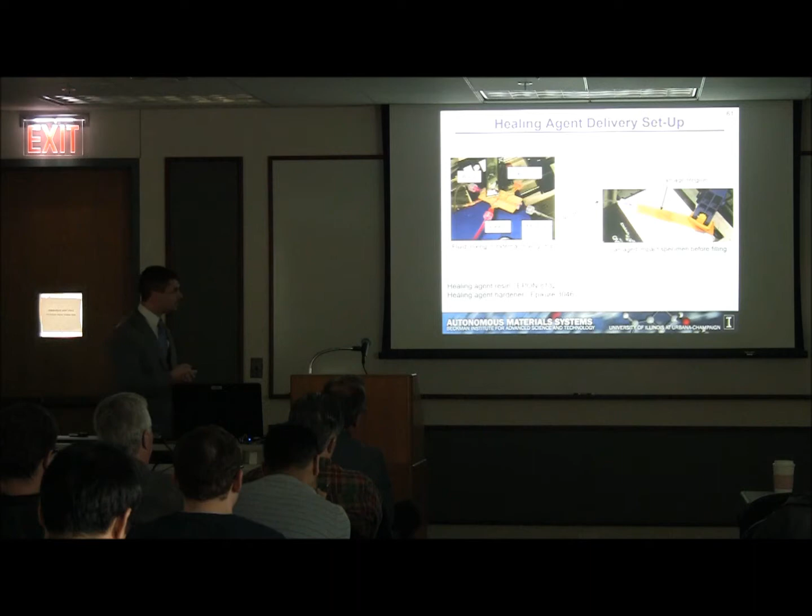These are some images of the filling occurring from overhead. We can fill the channel sequentially, first filling channel number 1, then channel number 2. Channel number 1 starts by infiltrating the channel from below, then it actually pierces through the delamination at this point. We start to see some index matching occurring over time with this impact specimen until we're finished with that channel and stop seeing more infiltration of damage.

Then you can imagine this sample is flipped 180 degrees, and now we're coming in on the opposite channel. Again, the piercing point is roughly in this location, where it goes down into the sample, and then we start to see increased optical matching, indicating that we've filled some of the damaged regions.

What's interesting to note is that even in these situations, not all of the damage is filled. We think this has something to do with the damage connectivity in the material, and I'll discuss more about that when we get to some of the cross sections of the material.

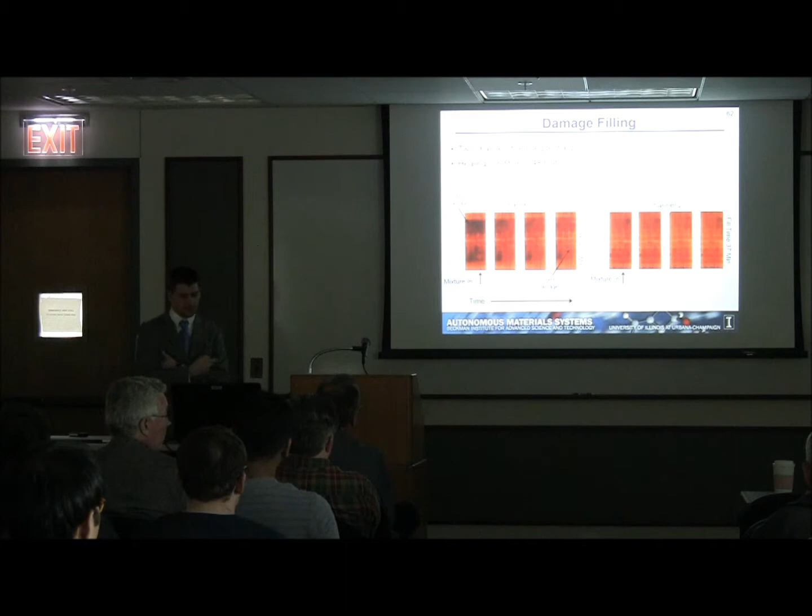After allowing 48 hours at 30 degrees Celsius for the healing to take place, we test these samples in post-impact flexure again. Our outer span is 80 millimeters, inner span 40 millimeters, and we're again looking at flexural strength and secant flexural moduli. Now we can define two metrics of healing efficiency for both strength and moduli: healed minus damaged flexural strength divided by undamaged minus damaged strength, similar to healing efficiencies previously observed, and similarly for moduli, healed minus damaged over undamaged minus damaged.

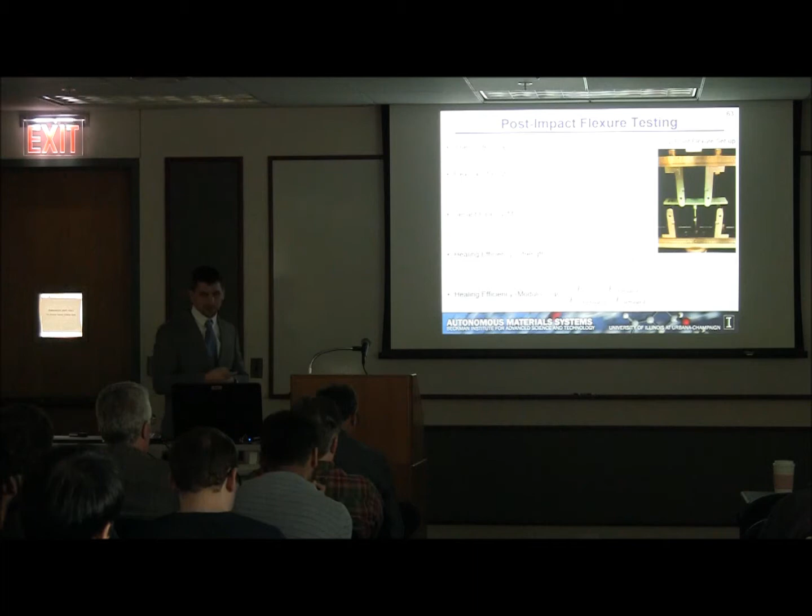If we plot the flexure testing results, plotting strength and stiffness moduli against different impact energies, we see with no damage a nominal flexural strength of about 520 megapascals. When we introduce damage, we have a reduction to about 220 megapascals with 10 joules of energy. When we fill impacted specimens and allow them to heal, we have a recovery of about 37% healing efficiency.

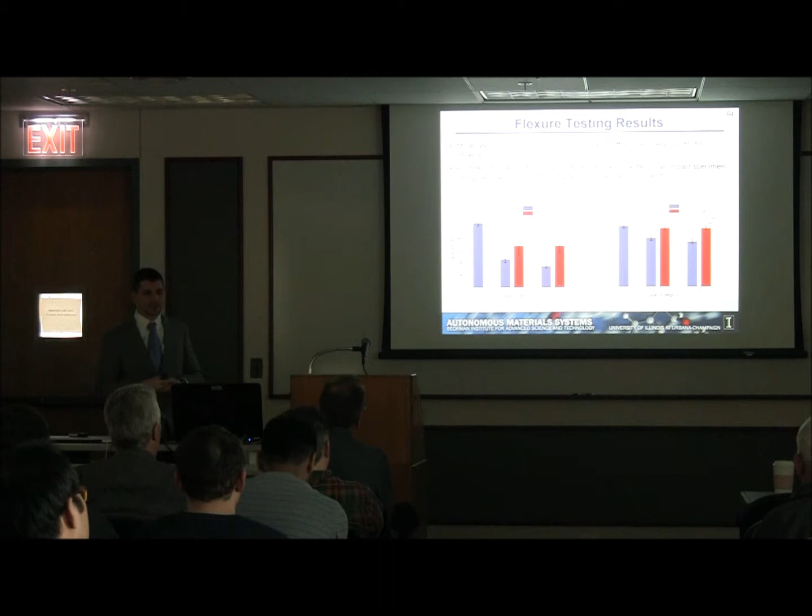Similarly, if we look at the reduction for 15 joules, it goes down to approximately 180 megapascals, and when we fill the systems and allow them to heal, we have a recovery from that damaged state of 47%. With the flexural moduli, we see recovery values of about 80% and 83% for the 10 and 15 joule cases. This was the first demonstration of restoration of mechanical properties in an impact specimen using vascular delivery of segregated epoxy components, which was another nice accomplishment of what I've done here.

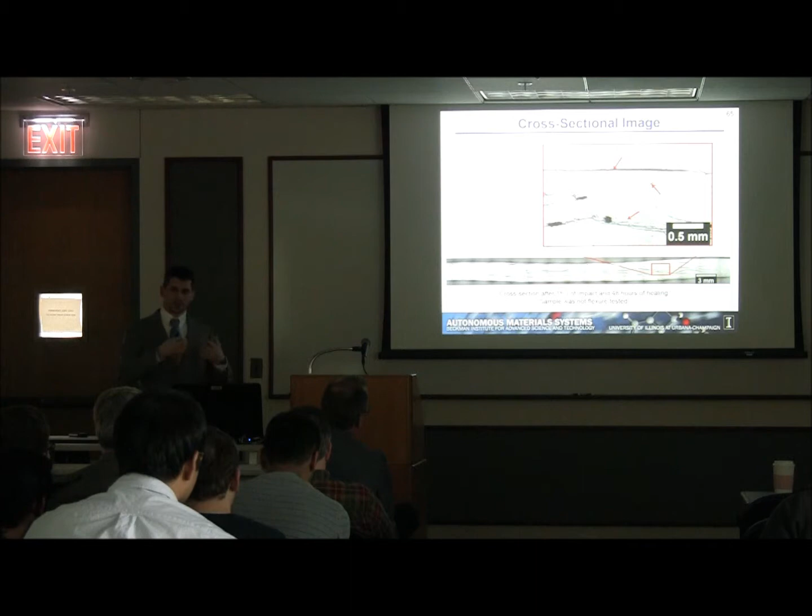We can take a look at cross sections of samples that have been impacted and filled with our healing agents, looking for visual evidence of healed material inside of the crack. So we have the healed delamination here, and healed delamination here. Interestingly, there are still regions that are unhealed. We have this delamination here, which did not receive healing agent and was not healed.

We think this has to do with damage connectivity issues, where there's a segregated area of damage which does not have a connection with the microvascular network to receive healing agents. We cannot heal those damaged regions. We can visually quantify the amount of damage fill using what we call filling efficiency, an optical technique using images from the filling of the samples during the healing process. If we compare undamaged, damaged, and healed specimens, convert them to grayscale, and look at the average pixel intensities of each image, we come up with a value for each.

Then we come up with a metric of fill efficiency, which is simply ratios of these values, measuring on a scale of 0 to 1 how much damage has been filled based on this optical technique. We plot the healing efficiency as a function of the filling efficiency, and notice two things: the healing efficiency tends to positively correlate with the filling efficiency, and the fill efficiency values tend to be higher for samples impacted at 15 joules compared to 10 joules. We believe this has to do with damage connectivity—samples impacted with 15 joules are more likely to have more connected damage than those impacted with 10 joules.

So to conclude some of the impact studies, we demonstrated self-healing of impact damage in vascular fiber-reinforced composites. We had an average of about 47% of the post-impact flexural strength recovered, and about 83% of the post-impact modulus recovered on average. We also saw that the filling efficiency correlated with the recovery of post-impact strength, indicating that the more we were able to fill, the better we could do.

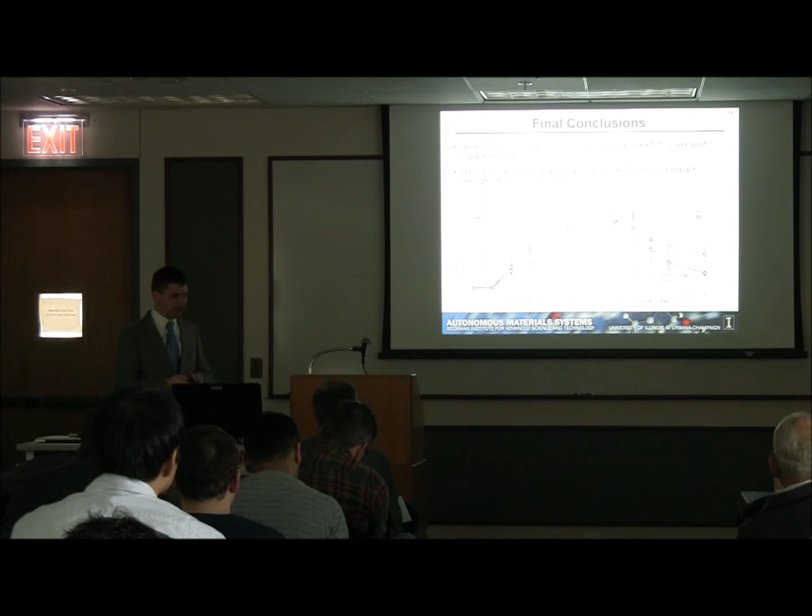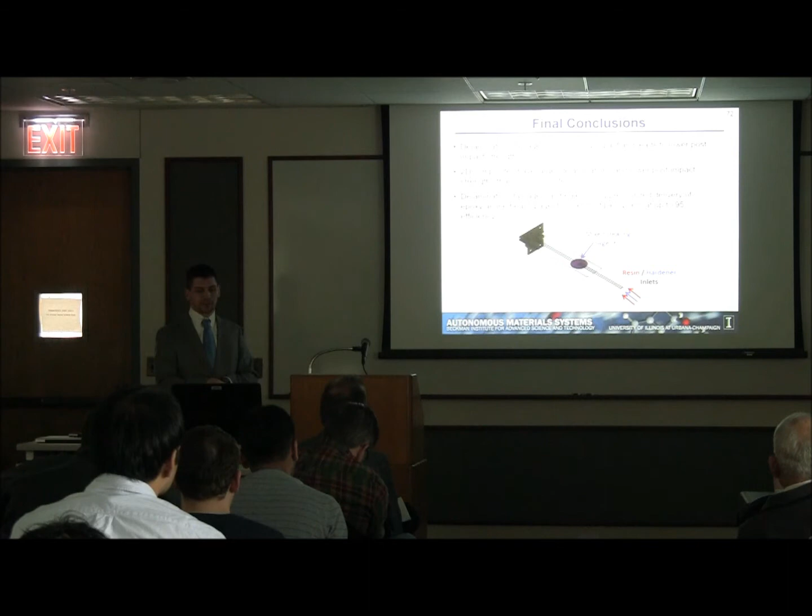We demonstrated delamination damage being healed using pressurized delivery of epoxy-amine healing agents, and saw up to 95% efficiency, with slightly lower efficiency for multiple cycles, but up to 10 healing cycles possible.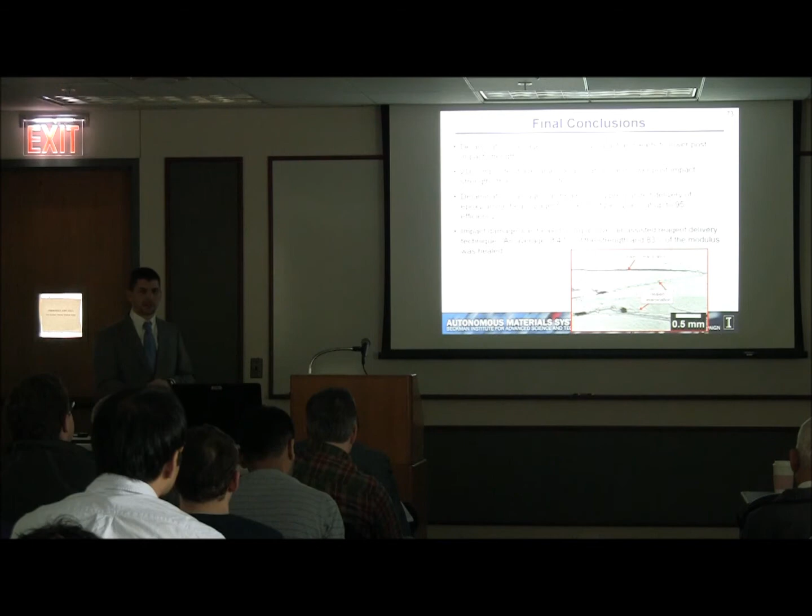Also, looking at the cross-sections, we were able to visually see that impact damage was healed using this novel air-assisted reagent delivery technique, with an average of 47% of the strength and 83% of the modulus healed in the 15 joule locations. So to highlight the contributions of my time here at Illinois, when all is said and done, I'll have 5 publications.

Quantification and comparison of impact damage formation in 2D and 3D woven composites. Quantification and comparison of post-impact mechanical properties. So this is sort of a part 1, part 2 set of papers.

Then we have a paper on the first demonstration of in-situ healing of delamination damage over 10 healing cycles using vascular delivery of agents—this is the double cantilever beam work. Then we looked at the first demonstration of self-healing of impact damage in a vascular composite by delivery of segregated epoxy-amine agents.

Finally, one thing I didn't really talk about today was looking at alternate chemistries for providing some of this vascular healing. We did successfully create a novel cross-linked epoxy for latent self-healing applications using an embedded imidazole functionality.

I contributed to 3 other papers as a co-author: one with Brett Krull and Jason Patrick, looking at a novel method for automatically tracking crack propagation during double cantilever beam specimen testing. One I co-authored with Jason Patrick in Advanced Materials, which was the first demonstration of in-situ healing of delamination damage using vascular delivery of agents.

I was also part of a review article on self-healing materials in 2013. I was also part of one patent here with Jason on self-healing composite materials and microvascular composites for forming the materials. Lawyer speak, I guess, there.